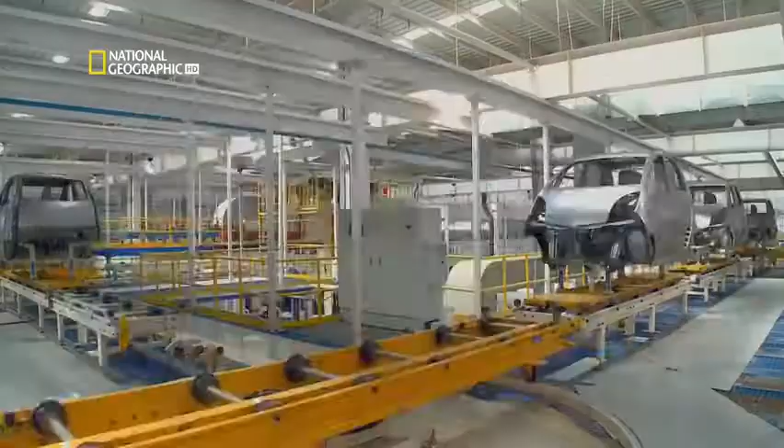But he'll have to battle skyrocketing costs, huge engineering hurdles, bad press, and violent uprisings. All challenges for the mighty Tata Motors mega factory.

Soon expected to overtake China as the most populated country on Earth, it's already home to 1 in 6 of the world's people. 2/3 live in small rural villages, seemingly untouched by time. But ancient India is urbanizing at a dizzying speed.

Despite that, only 15 out of every 1,000 Indians own a family car. For most, it's a dream, way beyond their reach. They make do with a family motorbike, or get a ride with friends. But that could change when Tata Motors releases the world's cheapest car, the Nano. It's the dream of company chairman and legendary tycoon, Sir Ratan Tata.

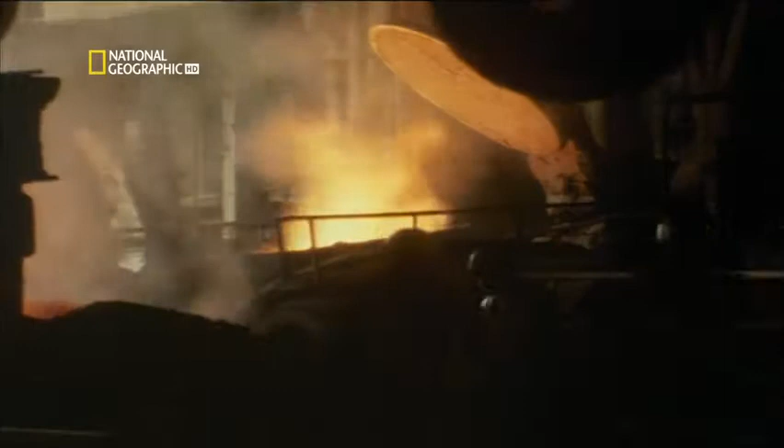He works his way up from running a furnace at Tata Steel to running the entire Tata Group. It's a global juggernaut worth $100 billion. In India, Tata is everywhere. Tata hotels, malls, communications, and above all, Tata Motors, one of India's top 3 car makers, a world leader in trucks and buses, and now proud owners of British luxury brands Land Rover and Jaguar. But even for India's most powerful CEO, reinventing the car is going to be a gargantuan challenge.

To make his dream come true, Tata has pinned his hopes on a purpose-built mega factory near the town of Sanand in the state of Gujarat. It's a sprawling 450-hectare complex of massive workshops, linked by roads and sky bridges. The workforce of 2,300 mostly get here by bus or a trusty motorcycle.

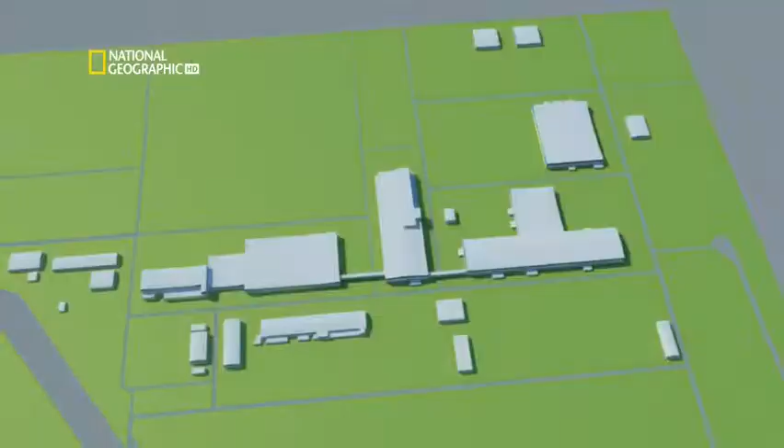The factory is made up of 5 main sections. The engine and transmission are assembled in the powertrain building. Sheet metal is pressed into panels in the press shop. The weld shop assembles the panels into a body, which is sent across a sky bridge to the paint shop. All the parts come together in the trim, chassis and finish, or TCF shop.

When it gets up to speed, this factory can produce 350,000 Nanos a year. It boasts state-of-the-art automation and over 130 robots that would be right at home in Japan.

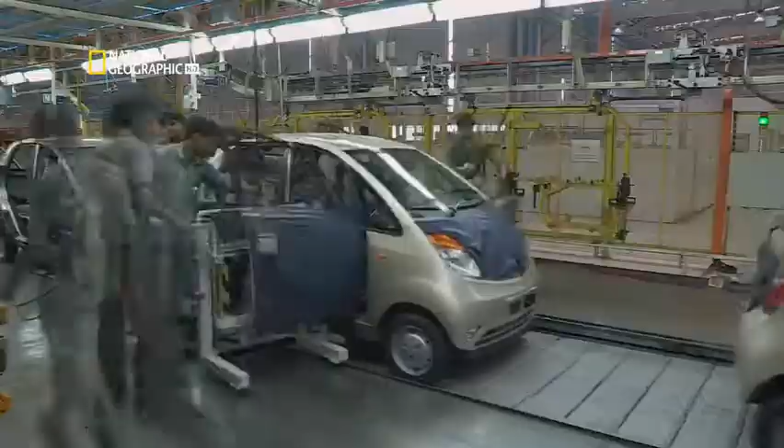But to run them, they'll have to train a workforce of villagers. Just one of the many challenges the team must overcome. They're going to deconstruct the car as we know it and put it back together with fewer parts and at half the cost. They'll have to reduce the cost of everything, from design right through to production. But it still has to be a car that people will want.

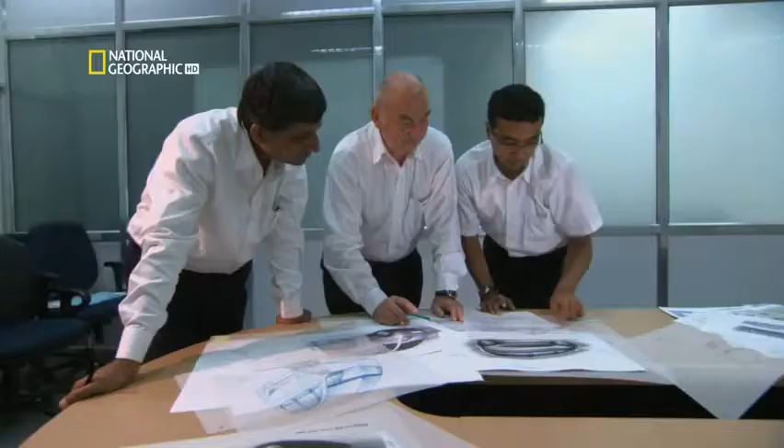It's a real conundrum. Safety, aesthetics, fuel economy and handling are all going to be important. But if they blow the budget to achieve them, the Nano will lose its unique selling point as the world's cheapest car. No wonder the design team is a little nervous.

The team came back after the meeting with Mr. Tata in 2003. Was really initially very much confused. Well, there was a lot of doubt whether we can really achieve it. It was really a challenge. We had never heard of a price that low. It was so challenging that I said, hopefully we can do it, but it will be the most difficult project in my life.

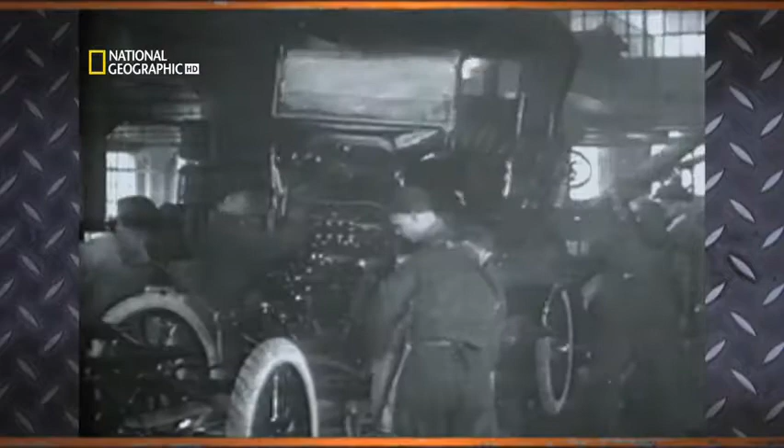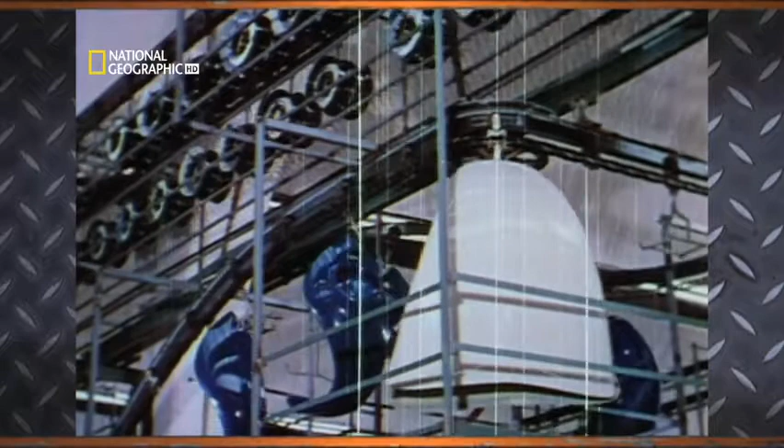If they succeed, the team could make history. The Nano will be a people's car. India's answer to the Model T Ford. When Henry Ford introduces the Model T, the $850 price tag puts car ownership in the reach of millions of Americans. That's about $21,000 in today's money. Volkswagen is German for people's car. It goes on sale for today's equivalent of $11,000. The Nano is slated to come in at a quarter of that.

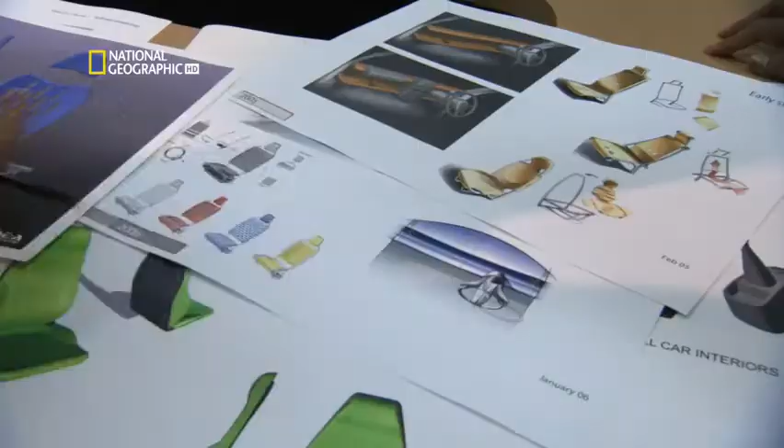Designing this impossible car happens at the passenger car division of Tata Motors near Pune. Pune is the largest of Tata's 5 plants; it has 20,000 employees. But hardly any of them know what's going on at the Engineering Research Centre. Codenamed Project X3, it's so secret, only a select group knows it exists. As soon as the initial shock wears off, they start thrashing out ideas.

So the team initially worked on lots and lots of concepts. How to make this car, whether the car should have doors, whether the car should be made in plastic. We played with really crazy ideas, whether we can use composite materials, maybe paper somewhere, you know. Or whether it should be a 3-wheel, 4-wheel, whether the engine should be in the front, engine should be in the rear.

But some of their ideas, like bars to stop people falling out instead of doors, don't sit well with Mr. Tata. Well, they looked horrible. They looked as though somebody plucked an eye out and they were just empty sockets. And that led me to feel that probably a customer wouldn't want a half car. Tata is adamant that the Nano must have 4 doors. Even 2 doors would greatly reduce costs.

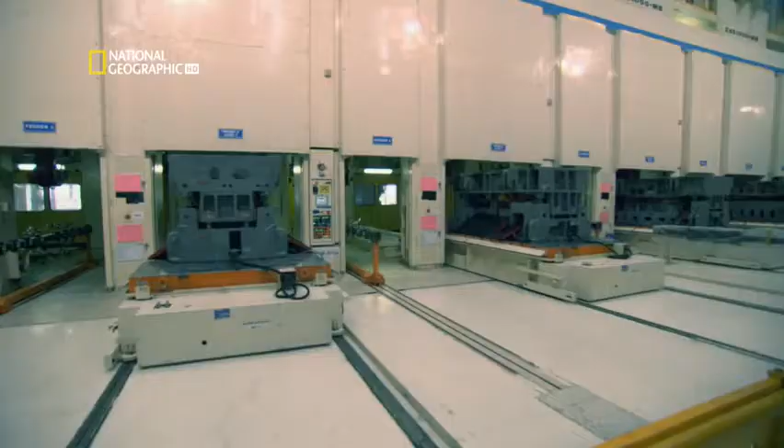That'd be all right in the West, where single-occupant vehicles are the norm. But this is India, where people ride 4 to a motorcycle. They're going to put at least that many in a car. And for women in traditional saris, clambering into the back of a 2-door car simply isn't an option. Why is it more expensive to make a 4-door car? For one thing, it takes 3 production lines to make 1 door.

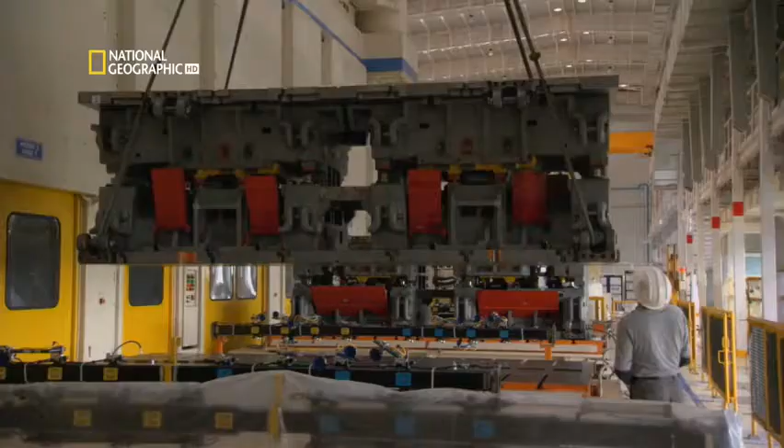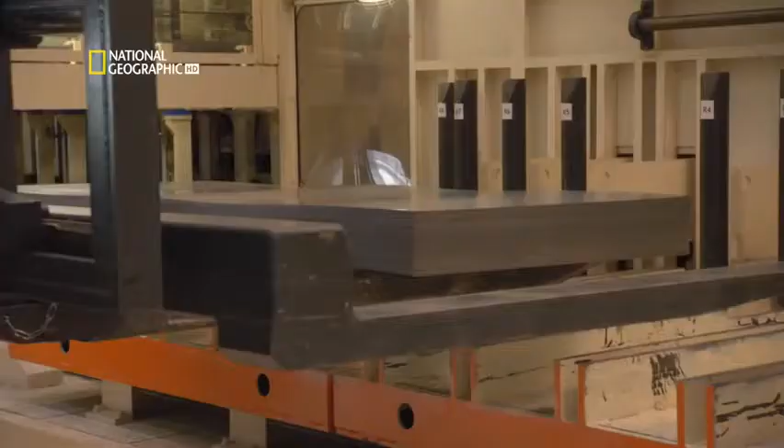And it starts in the press shop, where raw steel is shaped into panels. It takes 5 cast iron dies, each weighing more than a bull elephant, to make 1 door. The high-speed tandem press can stamp out 2 sets of panels simultaneously. Sheets of steel are fed into the press by forklift, much faster than the overhead cranes used in most press shops. Then, the tandem press gets to work.

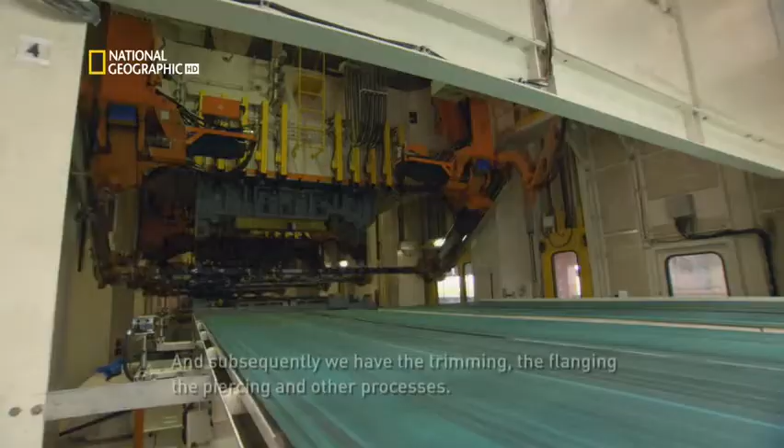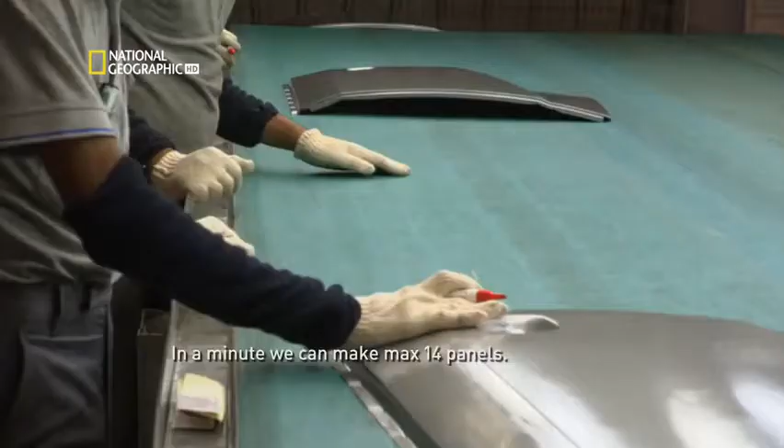First of all, you will have the basic shape of the car, and thereof the extra parts will be cut off. And subsequently we have the trimming, the flanging, piercing and other processes. In a minute, we can make max 14 panels. The finished panels are inspected for tiny imperfections by hand. Only those that pass muster are taken to the hemming line, where inner and outer door panels are joined together.

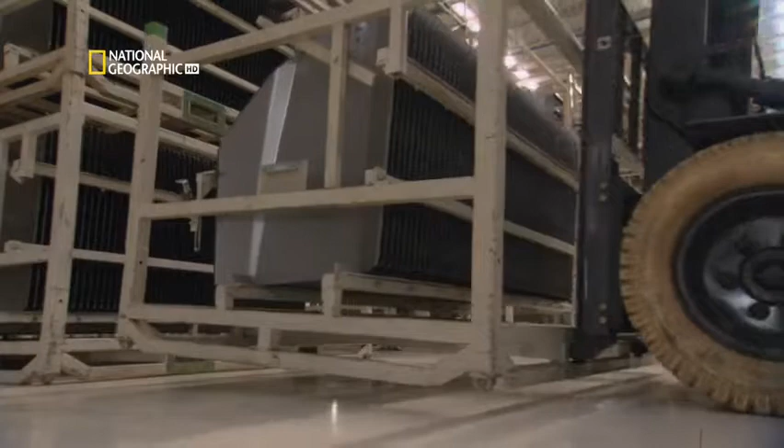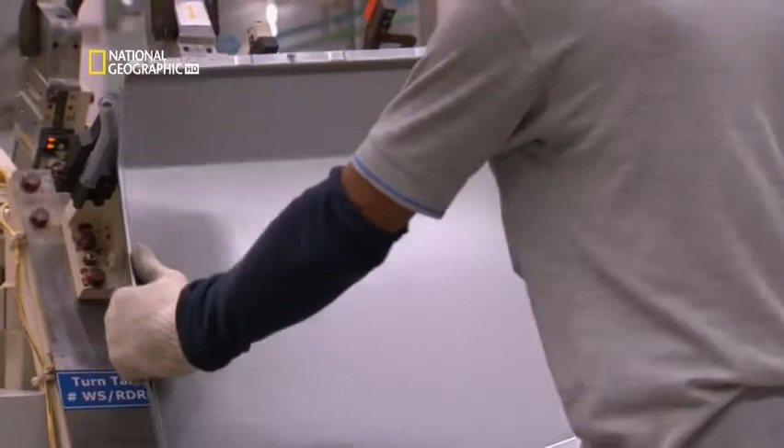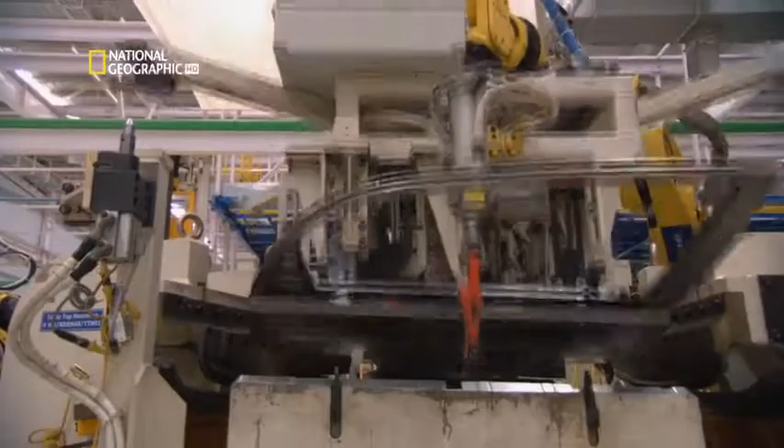It's a job that takes 2 robots and humans to feed them. First, a robot applies a noise-absorbing foam between the panels. It presses them together and folds or hems the panels to join them.

Robots help keep costs down, but achieving the Nano's 1 lakh price tag starts at the design phase. Despite the cost, the team manages to include 4 doors. Now they can turn their attention to the heart of the car, the engine. There are 2 important decisions to make. How big should it be? And will they put it in the front or the rear?

Rear engine cars are highly unusual. But for designers of compact cars, they have one very big advantage. It leaves room for more people. It was actually my dream, you know, because I knew to make such a compact car with full space for 4 people, you can only achieve it if the engine is in the back. It is kind of a Volkswagen lesson.

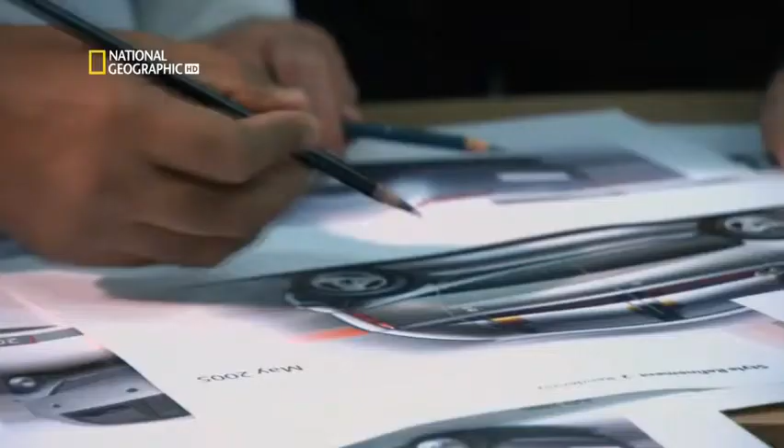But where the original Beetle's engine is behind the back seat, the Nano's is under it. That means raising the roof, which turns out to be another advantage. The lower the car is, the more difficult the entry, especially in India, maybe with a different kind of dress or sari. There are challenges too, such as keeping the engine compartment cool. I think we will also better address the requirement of cooling, which is coming from the engineering side.

After many attempts, the team places air scoops behind the rear doors. And it sort of shows that it's a rear engine, so it has a nice cooling duct created like a rear engine. Also much better is this quarter here, clean. Simpler. And yet it makes the car look much more sporty.

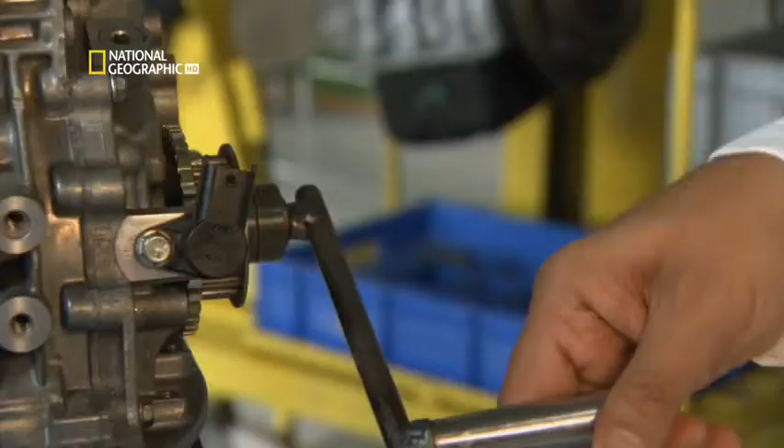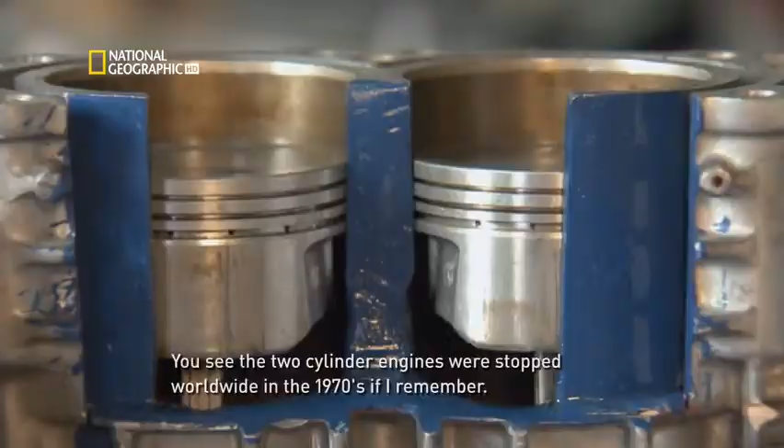Designing the engine itself is a job for Tata's legendary engine designer, Narendra Jain. To keep costs down, he decides to go with just 2 cylinders. You see, the 2-cylinder engines were stopped worldwide in the 1970s, if I remember. There's one big drawback to a 2-cylinder engine. It's inherently unbalanced and prone to violent shaking forces.

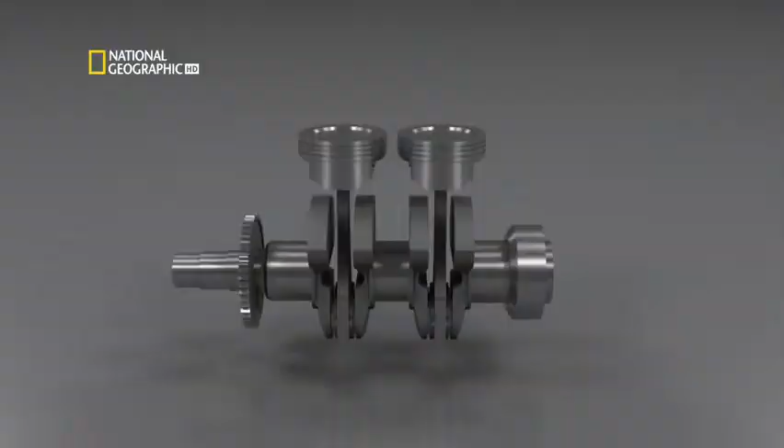In this engine, the 2-cylinder, both the pistons are going up and down at the same time. If we see, there are 2 counterweights. This is to balance the mass of this piston and connecting rod which is moving up. The weight of the pistons moving up and down is balanced by weights attached to the crankshaft. While the pistons move up, the weights on the crankshaft move down, balancing the vertical movement.

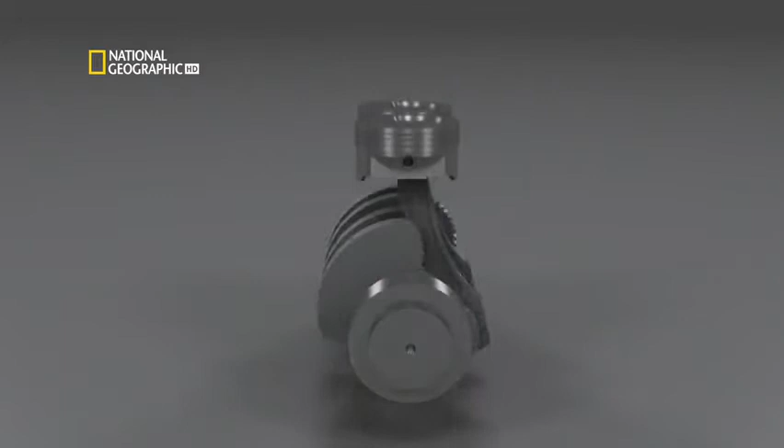But the crankshaft weights don't just move up and down, they turn around, which means the crankshaft now creates its own horizontal shaking. To counter that, Jain designs a single balance shaft. This weighted shaft spins in the opposite direction to the crankshaft, so it cancels most of the horizontal shake. Damping down the shaking with 1 balance shaft instead of the usual 2 means another cost saving. But will it power the car?

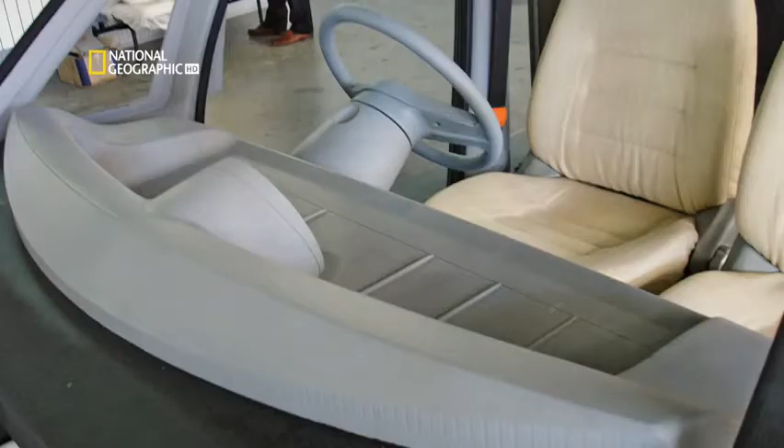To find out, they mount it on a simple frame known in the trade as a mule. So the mule is like a very, very early pseudo prototype, or the first thing that you see. This is what it will feel like. It gives you the idea of what the car feels like when you drive it, when you turn it, when you try to push the engine. The mule is the culmination of almost 2 years of work on Project X3. Showing it to Mr. Tata is a pivotal moment.

I drove mules through the cycle. The first one was very disappointing. The mule is woefully underpowered. So he drove and he was not very impressed. I mean, we were waiting at the test track to hear his reaction, and people who were with him in the car said that he was not very thrilled when he drove it.

It's time for some fresh blood. Enter Girish Wagh. He's just successfully developed a light truck called the Ace. The tiny 2-cylinder Ace is a smash hit. But can he do the same for the Nano? The first priority is to sort out the engine.

We increased the capacity of the engine, and believe me, this takes almost 9 to 10 months to do this kind of a job. We put it on a prototype again. It was refined enough so that you felt that it didn't sound like a motorcycle with 4 wheels. He came again, he drove the vehicle, and he said, I think now from a drivability point of view, we are there. The little engine that could comes together in the powertrain shop.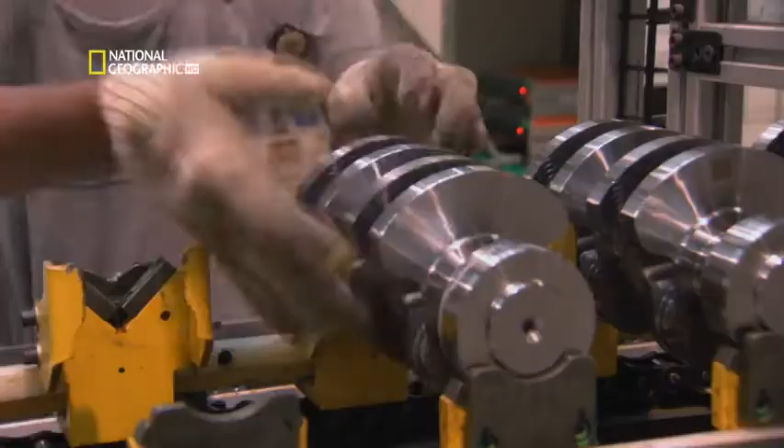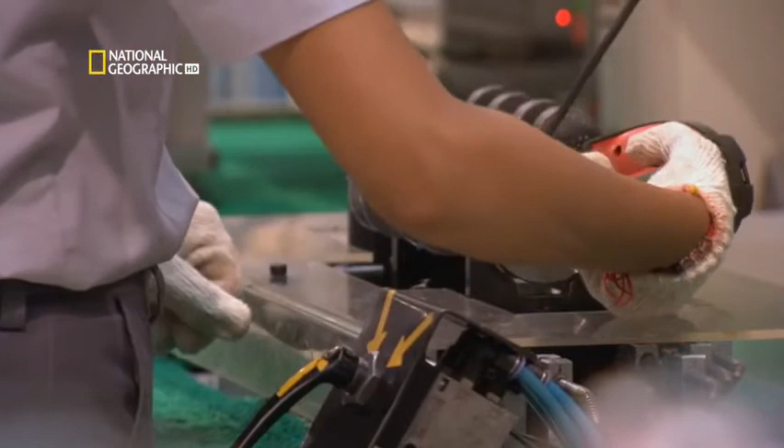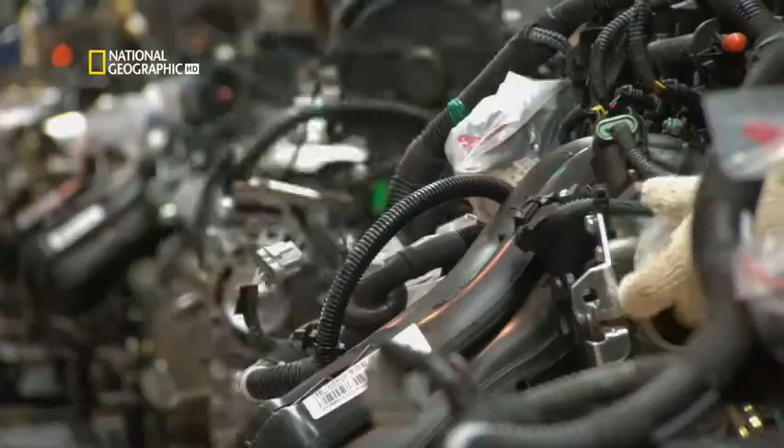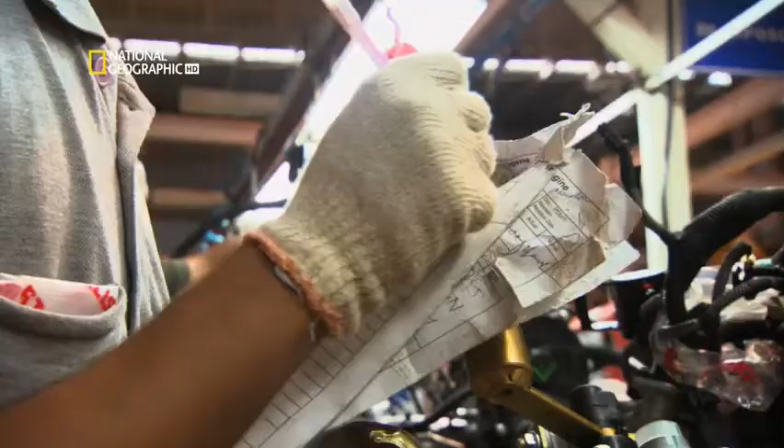Men, women and machines work together to make everything from the crankshaft to the engine blocks. The final assembly of the 35 horsepower engine is all done by hand. Skilled workers join the modest little power plant to a 4-speed manual transmission. This will see the Nano get an impressive 24 kilometers per litre, making it the most fuel-efficient petrol car in India. No point in making an affordable car that isn't affordable to run. The engine is also a lot cleaner than the polluting used cars and motorcycles it aims to replace.

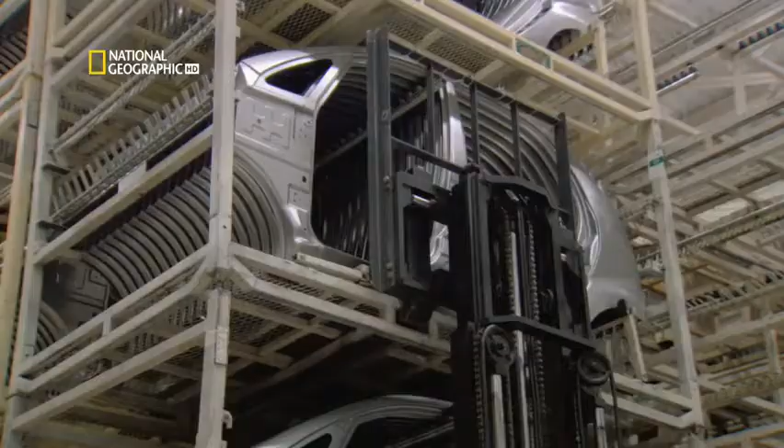While the powertrain is assembled, a body is born in the weld shop. Joined to the press shop, the weld shop takes in 11 kinds of body panels, which will be welded together to form a steel unibody. Most cars are made like this, but steel was not Team Nano's first choice. One word: plastics. Initially, when we started, we thought we'll go for a plastic body instead of a sheet metal. And the idea was to reduce the weight. But it's an idea ahead of its time.

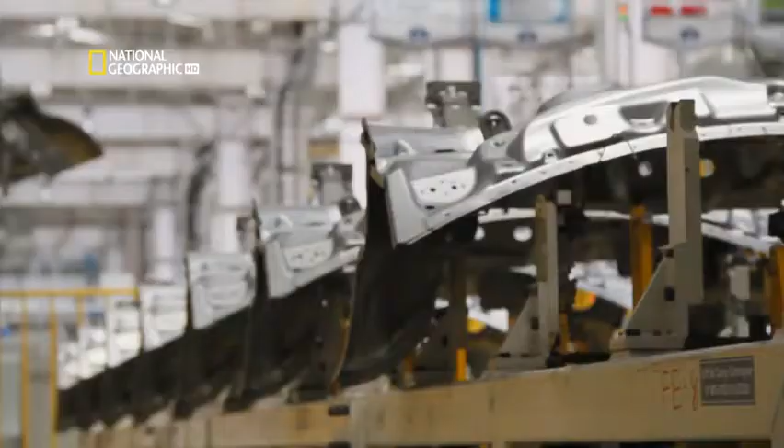We found out that if we go for a plastic, from the cost point of view, you are not better, you are worse. And India may not be the right place for plastic cars. In terms of Indian driving conditions, in terms of dentability, the sheet metal is better. If you have some dent, you can repair it very fast. You need not change the panel completely. So steel it is. 130 robots in this ultra-modern mega factory weld it together with ruthless efficiency.

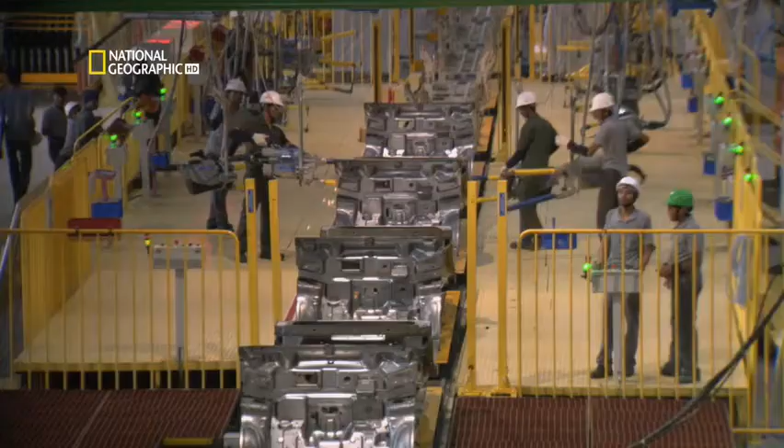But raw material prices increased 40% between Tata's announcement of a 1 lakh car and the start of production. Perhaps the greatest fear in my mind was that as we had transformed to a conventional process, we would not make the price line that we had thought of. For Tata, a promise is a promise, and it's up to his engineers to deliver on it. So how do they do it?

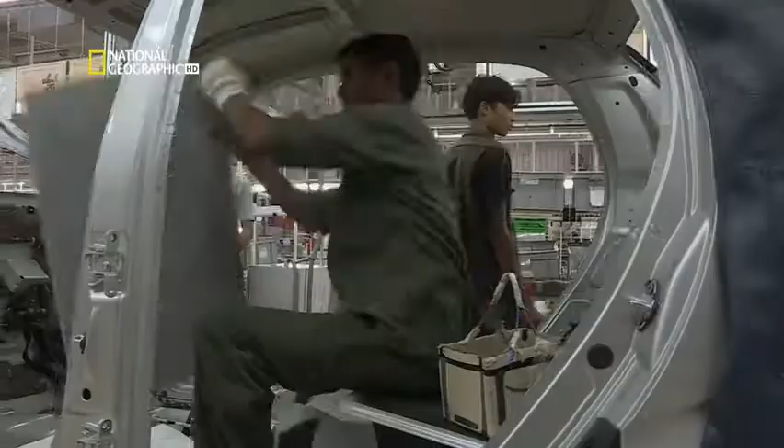From our experience, I don't think there is a single magic bullet. We have to work on each and every part in the car and see how we can reduce the cost of that part, or eliminate some of the parts, or combine the functionalities so that finally the number of parts comes down. They call this minimalist approach Gandhian engineering. Nothing goes unquestioned.

This is the fuel pump unit. This goes into the fuel tank. So there are basic 5 components here. One is the fuel pump, a pressure regulator, a rollover valve, a fuel level sensor, and this is the flange which holds everything and mounts everything onto the fuel tank. To get the price of the whole unit down, they asked the supplier to reduce the cost of each individual component. They proposed the pump from the motorbike because our engine is very small, 2-cylinder, 624cc engine, so it makes sense that this capacity is enough.

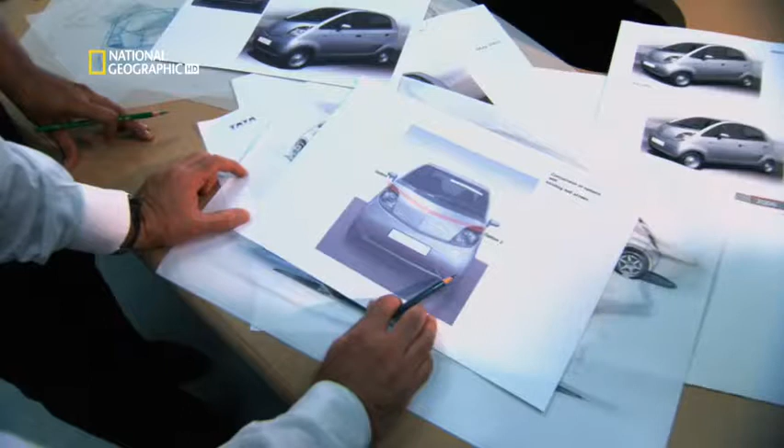For all their clever engineering, the designers are most proud of the Nano's looks. The lamps are like eyes, a little bit smiling. I like the idea of big lamp, Nikhil, because we have to have some element which shouts to the people and which shows character to the car. If not, we'll finish with plain surfaces. Horizontal lamps and a curved bonnet give the Nano an almost human face. The team feels sure it's onto a winner. We need a strong element, very singular strong element.

But Mr. Tata wants one more change. This was almost a week after we signed off the final design. He observed the car and noticed that the nose dived down rather quickly for the length of the car, and he thought that it'd make the car look snub-nosed. He wants it to be 100 millimeters longer. At the same time, they have to move the wheels out to the very corners of the car to free up more space for passengers. The car was so compact that we had a little bit of a problem to make a nice shape. So this extension actually improved packaging, improved stability, and also improved styling.

But the changes mean pressure on the entire team. And we really worked 24 hours a day. We had to work really hard then. And when he saw it, he was quite happy. And I think after 2 weeks, we had signed off the CAD concept.

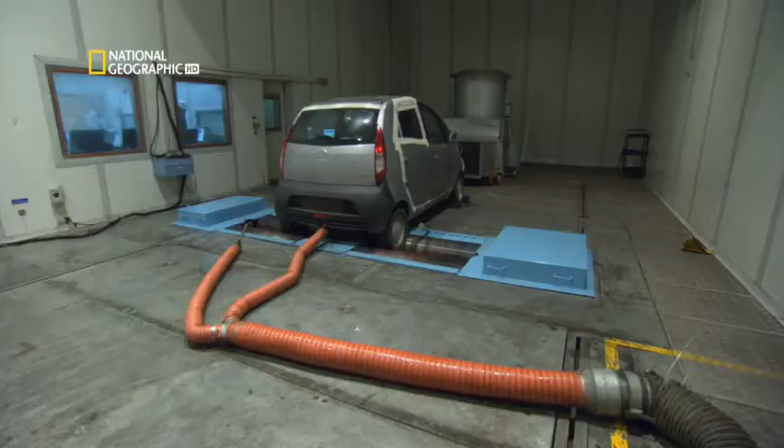Before they reveal the prototype in public, it must pass a punishing series of tests that simulate Indian road conditions. Tight turns for narrow city streets. A torture track as rough as any Indian road. A 30-centimetre water trough mimics the monsoon floods. You could even take your Nano to the Himalayas. It handles steep hills and has been tested and approved at temperatures as low as -50 degrees Celsius. They're ready. It's time to show the people's car to the people of India.

Ladies and gentlemen, thank you for being with us on this memorable occasion. While a holographic image of Tata warms up the capacity crowd at the Delhi Auto Expo, the man himself waits nervously backstage. If you want to name a moment of fear, that was truly it. As I sat behind the curtain, I kept thinking of all the things that could go wrong.

And when I did drive the car out in a darkened hall, what struck me was the enormous amount of people there and the applause and so on, and it shook me up a bit. Overawed by the cameras flashing, and I'd never faced anything like that in my life. Probably never again anyway.

Tata needn't worry. The Nano is a smash hit. The reaction at the opening was far, far beyond my expectations. You could see hundreds of cameramen, hundreds of press people. Flashbulbs going around, people clapping, and there was thunderous applause. I don't know what people may have expected to see, but definitely they did not expect to see a Nano.

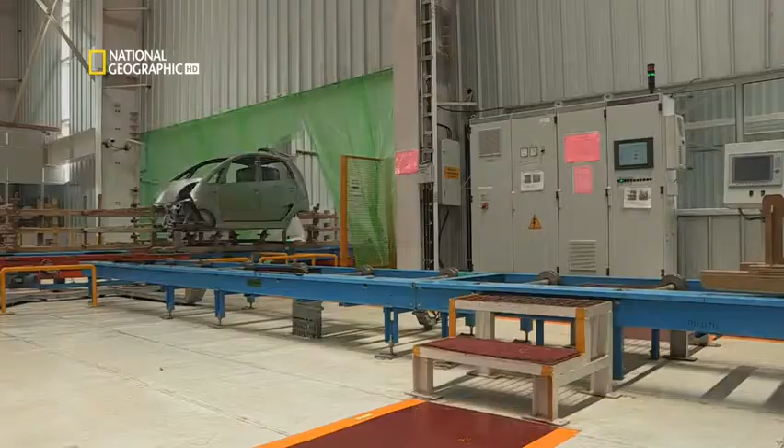Back at the factory, it's time to kick the production line into top gear. First stop, a good coat of paint. The paint shop is a short ride by Skybridge from the weld shop. The industry calls an unpainted car frame a body in white, or BIW. The doors and bonnet are clamped open so that the paint can reach everywhere.

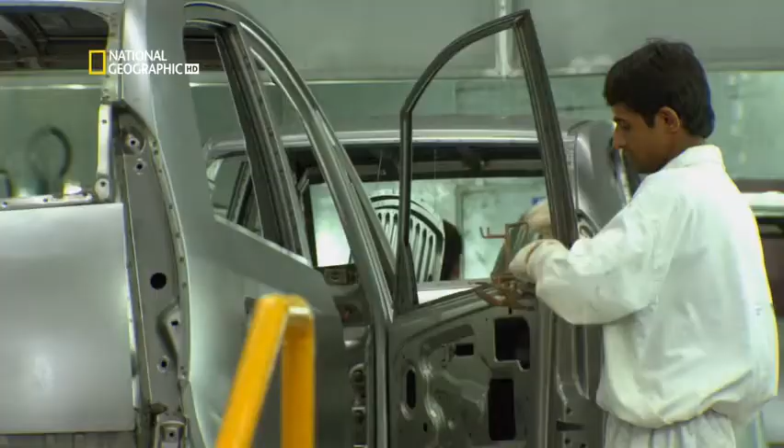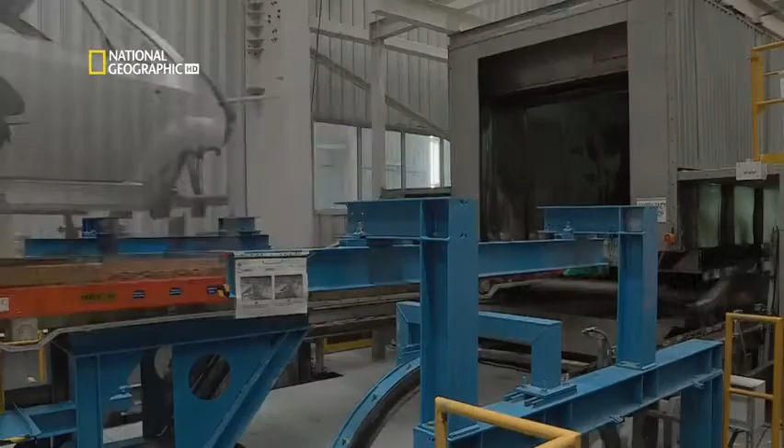The BIW is thoroughly checked for defects. Then it's degreased and prepared for painting. Once the body comes into the paint shop, the body goes for the pre-washing. After the pre-washing, the phosphate coating is happening. After the phosphate coating, the body goes for the electro coating. The protective primer is bonded to the freshly prepared metal by an electric current.

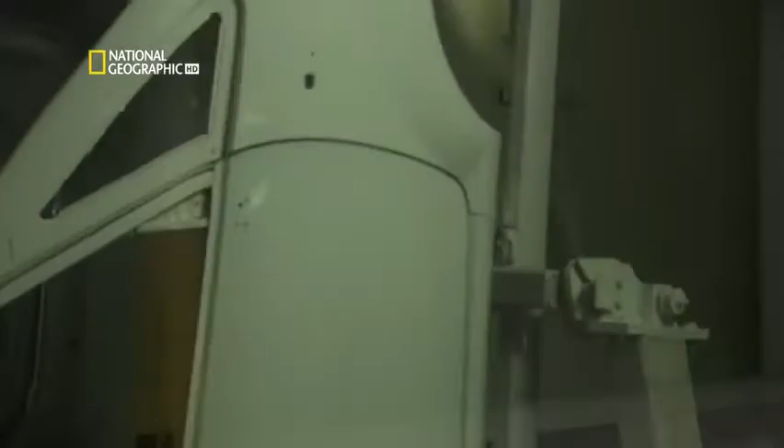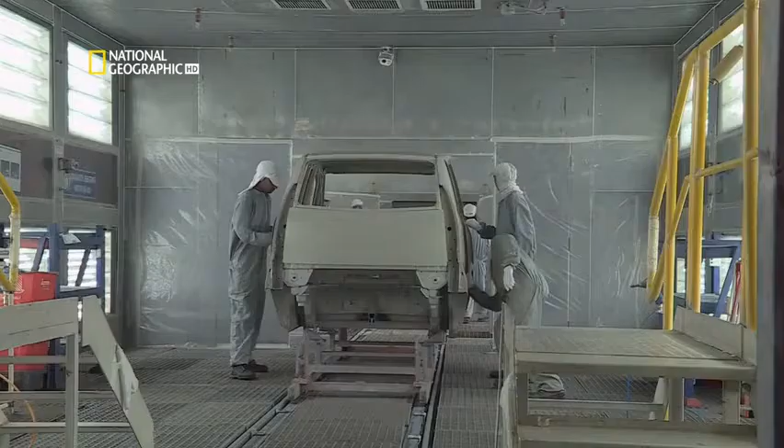This coating is extra important in modern cars because the entire structure is made of thin sheet metal. Any corrosion could spell disaster. Spinning the body 360 degrees guarantees all-over coverage. It means that coating applies to every corner of the body, not only from the outside, but also from the inside. Now the primed bodies are ready for painting. Once again, they're inspected.

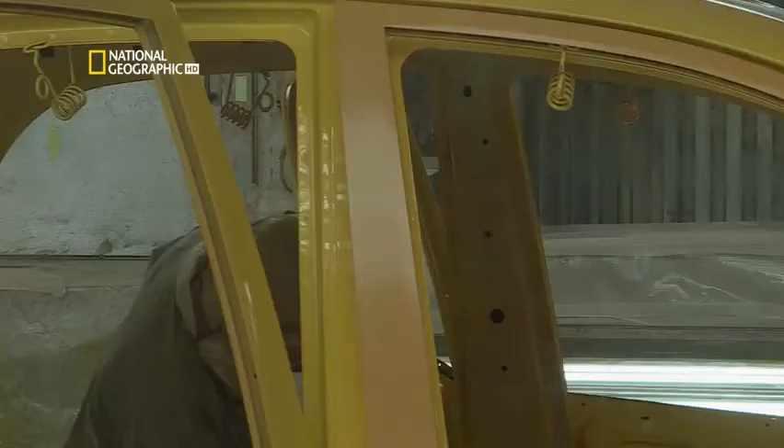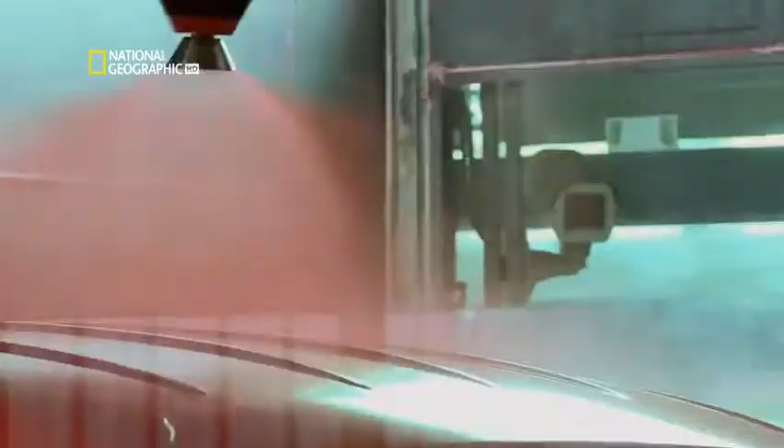Then the insides are painted by trained technicians, while the exterior coats are applied by programmed robots. In this energy-efficient paint shop, all the paint coats can be applied in quick succession. The bodies are only baked once all the coats have been applied. The paint shop is one of the most expensive parts of any car factory. And this is the second time Tata Motors has had to build it.

They built the first paint shop in 2007 at the original Nano factory in Singur in the communist state of West Bengal. We went to West Bengal because we felt that part of the country had been vacated by industry for some time. And I really believed that the government of West Bengal was genuinely keen on bringing industry back. So with a leap of faith, I convinced the board that we should go there.

But ownership of the land allocated to Tata by the government is disputed by local farmers. From the outset, they try to thwart construction. We had a fair amount of people beaten up, material being stolen, walls being broken. For 2 years, Tata holds out, but eventually the situation becomes untenable. At one stage, at the height of the problem, there were close to 100,000 people outside the gate. They were now just weeks away from opening, but it was too dangerous to continue in West Bengal.

That decision to close the plant was a very painful decision, you can understand it. I can't explain to you the feeling that we went through. Much as it hurts them, they're going to have to move the whole shebang 2,200 kilometers to a friendlier home in Gujarat, on the other side of India.

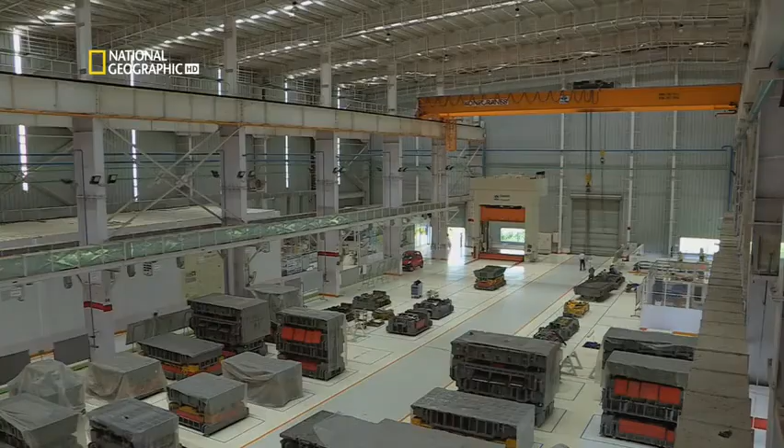It'll probably be the world's biggest ever relocation. And as if that wasn't enough, the project is now dangerously behind schedule. We were a little worried because it was a Herculean task. Dismantle, shifting, installation and recommissioning, the total period was only 1 year. It takes Ramesh 3,400 truckloads to transport the factory, lock, stock and barrel, across India's notorious roads. A single road accident could derail the entire project.

Such huge plants needed to be shifted, but we did it. We did it successfully. There was no loss of parts, there was no damage, although we shifted 2,250 kilometers away from Singur to Sanand, but still we maintained the quality. Now Ramesh faces a new problem. There are few skilled workers to crew the factory in rural Gujarat. They'll have to train hundreds of villagers in a specially built training centre at the factory.

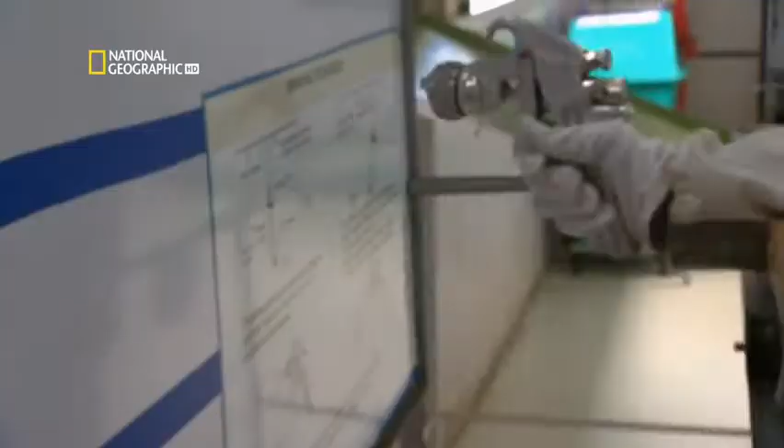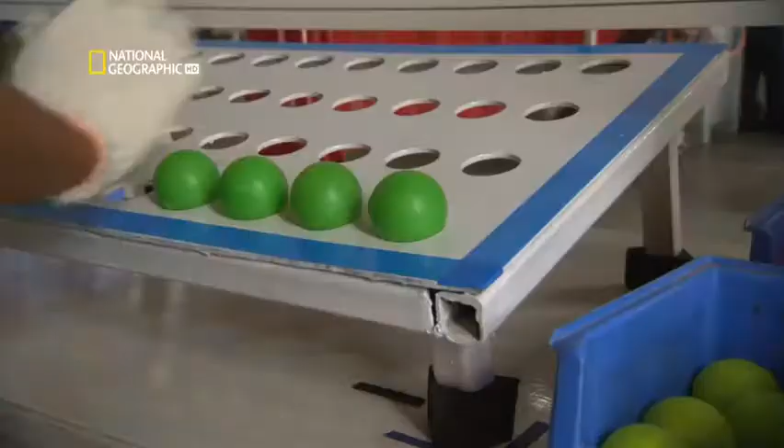They've just overcome 2 massive hurdles, only to be confronted by another. Some of the early Nano models catch fire on public streets. It's a public relations nightmare. Team Nano swings into action, setting up a team of local and international experts to investigate the fires. We said, let's look at it in a positive manner and let's do something even safer. We did a very thorough investigation and analysis of the situation. We also got some forensic experts from abroad, from the UK.

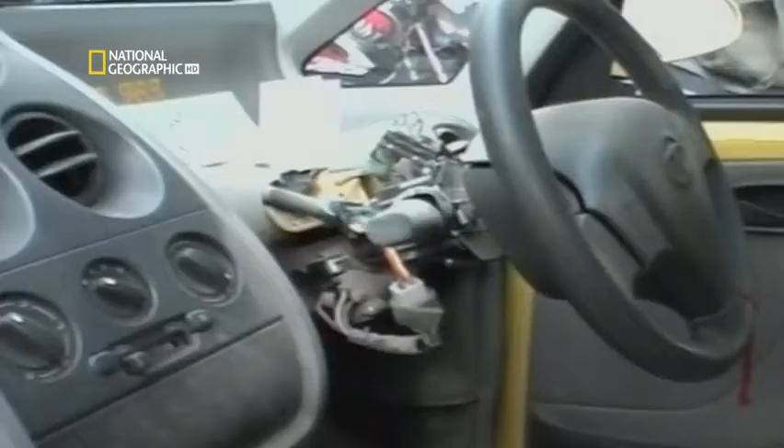And they looked at all the incidents and they gave a totally clean chit and said that nothing was wrong with the design of the car at all. In some cases, we had found that a foreign piece of cloth was left on the exhaust system of the car. And the customers had also tapped the electrical system for some accessories, and that had also led to some short circuit in the electrical system.

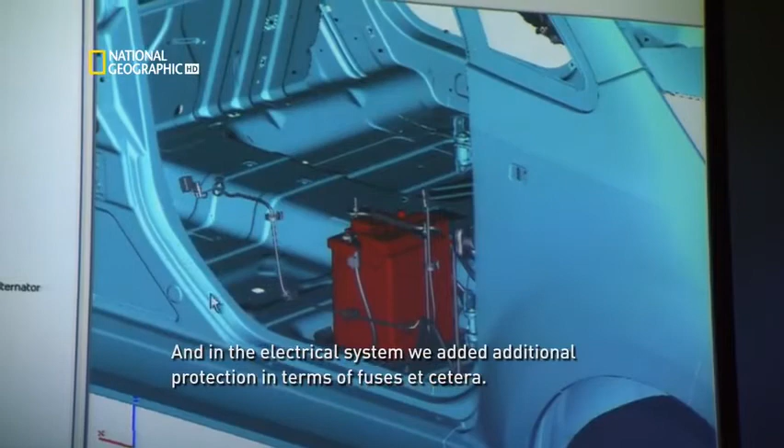In response, Team Nano decides to make the car even more robust. On the exhaust system, we provided additional protection. And in the electrical system, we added additional protection in terms of fuses, etc. Whatever causes we identified for the fire incidents on the Nano, we provided additional protective cover to ensure that such a case doesn't lead to the car catching fire. With the fires under control, it's time to celebrate.

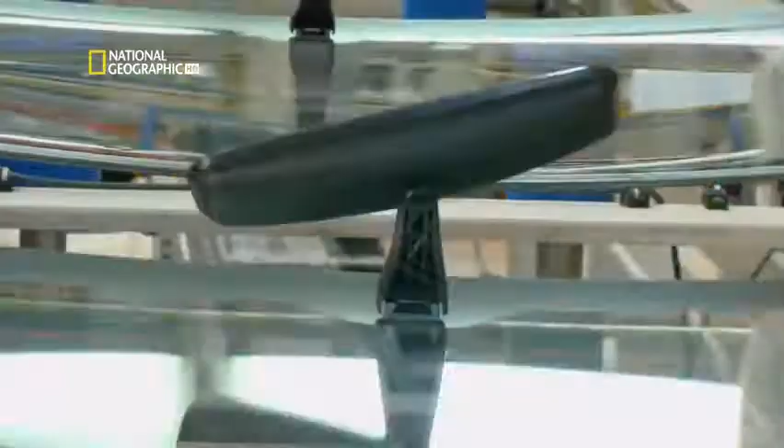In June 2010, Ratan Tata officially opens his new mega factory. It is a great occasion today to be here, and I hope that in the coming years, we will see the product on the streets and the roads of India, giving the people of India a chance to have personal transport. Production of Nanos finally reaches top gear. They need to sell hundreds of thousands of Nanos to break even, and that required sophisticated automation technology. We have 70% automation, 130 robots working in the plant. And in the body shop, one body can be produced within 53 seconds.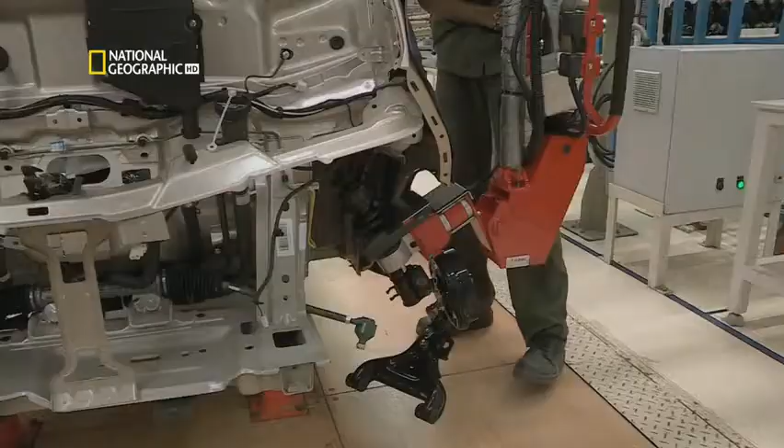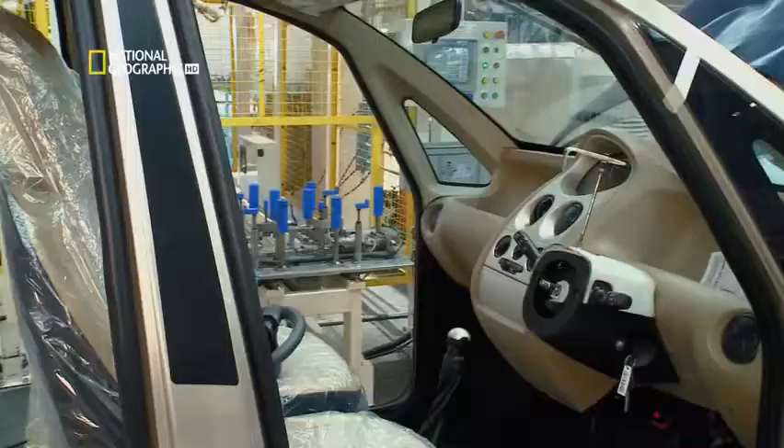The painted bodies arrive suspended from a monorail. In 6 short hours, they will drive out under their own steam. First, technicians install the fuel tank and wiring harness on the underbody. Next, the doors, which were painted with the car body, are removed to give workers easy access. Later, the automated system will match them up with the exact Nano body from which they came. On goes the front suspension. In goes the dashboard. The seats. And the steering wheel. It looks ordinary enough, but behind the wheel is another triumph of cost cutting.

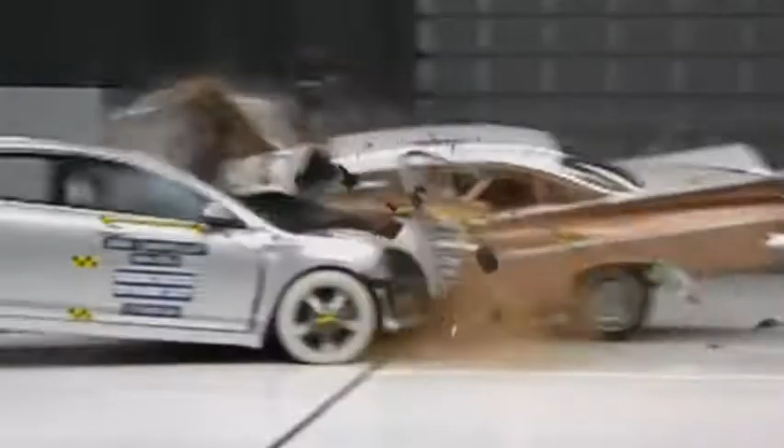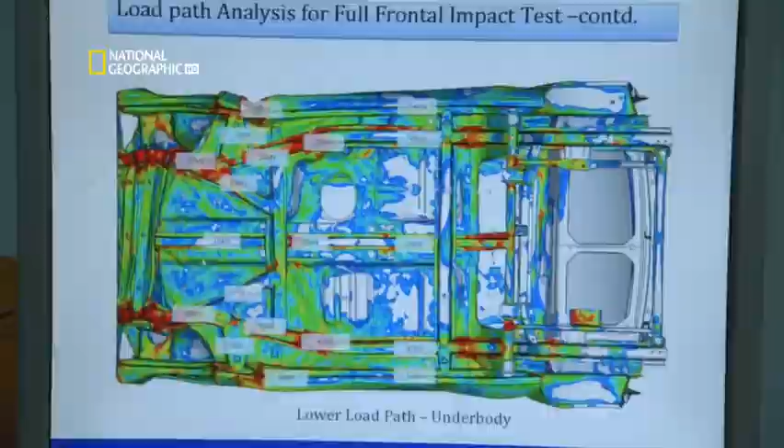Modern cars have expensive steering columns that collapse on impact. Non-collapsible steering columns haven't been used in the West in decades because they cause nasty injuries in a crash. However, Tata's safety engineers wonder if there isn't a way to cut costs without cutting safety. We can now say we don't need a collapsible column. Now with this improved design, we were able to go ahead without the collapsible steering column.

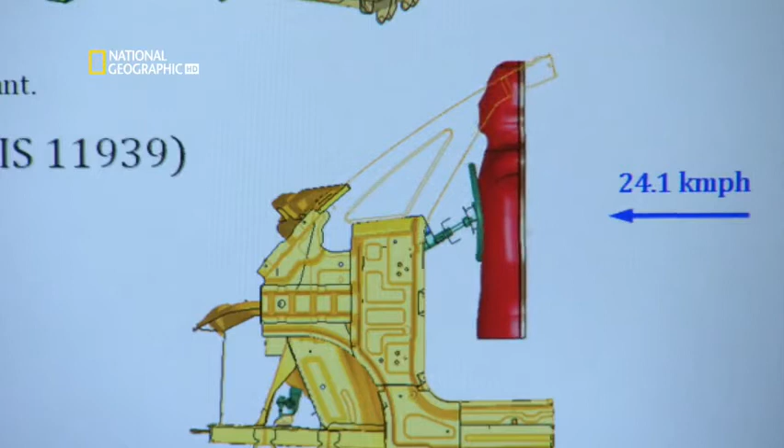Digital crash testing allows them to quickly and cheaply try out new ideas. They discover that instead of a collapsible steering column, they can use the front of the car to absorb an impact. So in Nano, we had to cut costs. So one of the things we looked at was whether, instead of going for a collapsible column, we could just make part of the structure deform a bit and not offer that high resistance to the chest. And when they crash a real Nano, their findings are confirmed.

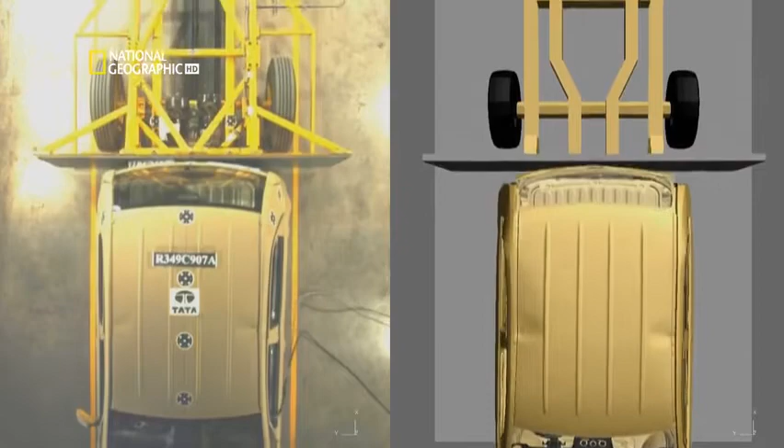The trick is having the engine in the rear. It clears off the space in the front of the car. You know, the complete front space was available for crush. So in this case, having the engine in the rear actually turned out to be a big bonus for the safety team.

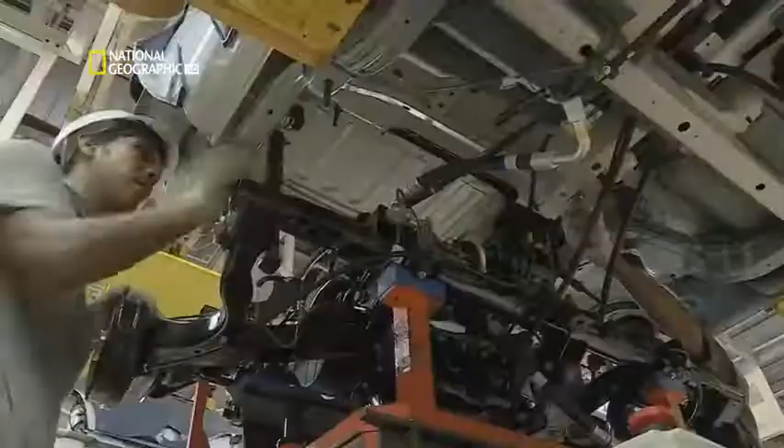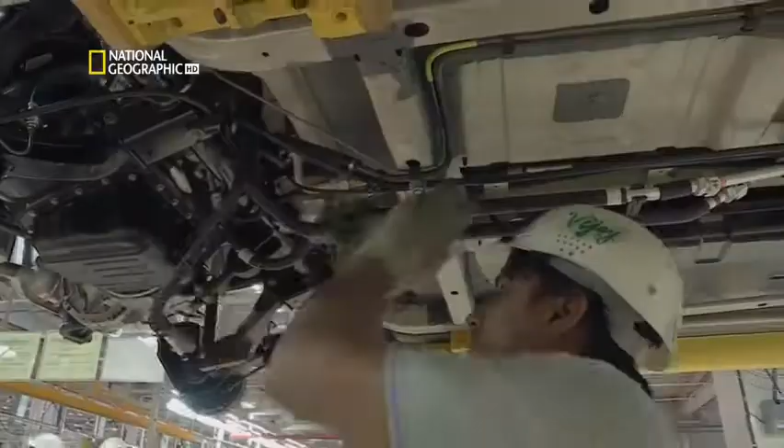Another big bonus is that rear engines are very easy to install in the factory. It slots in from below. The marriage of engine and body is more of a quickie Vegas chapel wedding than an elaborate church ceremony. It takes as much time to connect up the hydraulics as it does to bolt the engine beneath the rear seat.

But there is one disadvantage. When the Nano's small engine is running hard, it can be quite noisy. And that noise isn't under the bonnet, it's much closer, under the back seat. Reducing the noise becomes the biggest hurdle in the entire Nano project. So this Nano is a unique kind of car where there is a rear packaged engine which is sitting exactly inside the passenger compartment.

In this soundproof chamber, the team tests numerous engine mounts and sound-absorbing materials to reduce the noise and vibration felt by the car's occupants. With each change, they measure noise and vibration levels all over the car. After 3 years of hard work, we have solved all the issues, and right now the car is acceptable for the customer. It's small, it's tall, and it's surprisingly quiet inside.

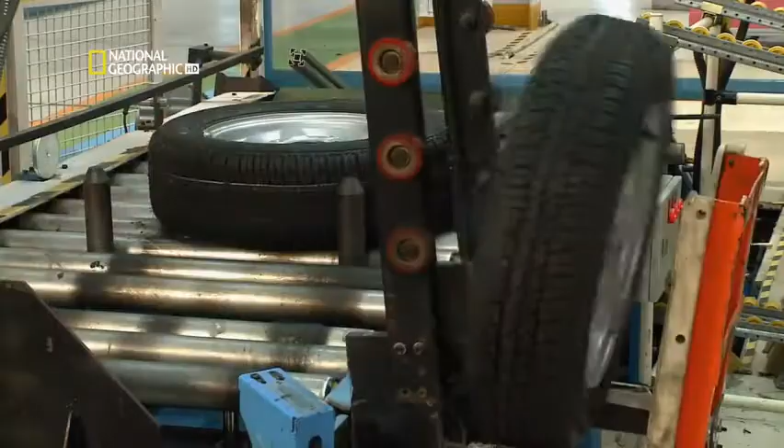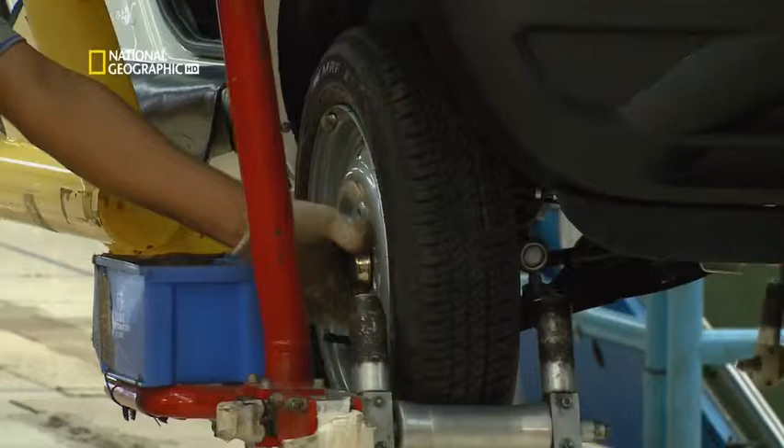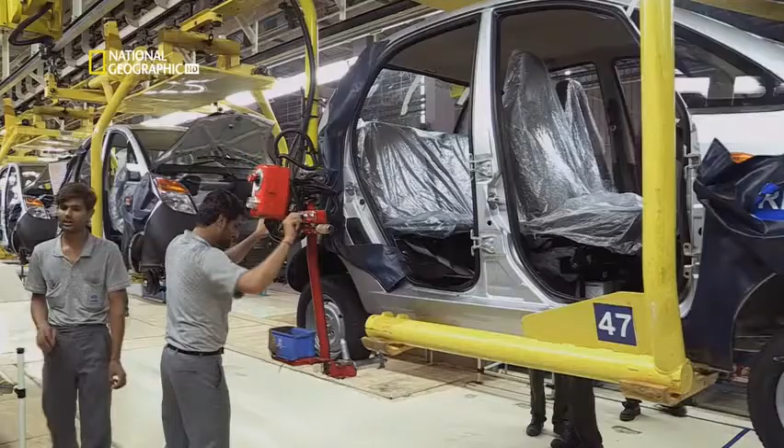But the technicians win the battle over lug nuts. There are only 3. So when we started with 3 bolts instead of 4 bolts, we made initial calculations and it really worked fine. We thought for this particular maximum speed of the car, the 3 bolts could be sufficient, and really it turned out to be that way. Finally, each Nano is reunited with its 4 doors. These people's cars are now ready for some people. Almost.

Outside, the rain is taking a break. But it's added an extra level of difficulty to the test track. Every Nano goes through this. And they test the brakes the old-fashioned way. Tata Motors starts to deliver Nanos to tens of thousands of eagerly waiting customers. Finally, everything is going their way.

But if you live outside the Indian subcontinent, don't look for one at a dealer near you anytime soon. There are no plans to bring the Nano up to stricter Western safety specs. In Europe and the US, Tata will instead offer a car based on the Nano platform. A concept car has already been unveiled. The Pixel is a futuristic-looking car made for city driving. We have tried to bring in a lot of new concepts on that. We have carried forward the rear engine philosophy, like Nano.

The Nano itself has only been out in the market a short while, but it's been garnering many great reviews. And Tata Motors are quietly confident about its future. I think it will turn into a big movement, I have no doubt in my mind, not just in India, but across the world. It's been a hard road to travel, but Ratan Tata's dream is slowly coming true. I will forever be respectful and recognize the effort the team made, because the real credit for the car and the heroes of this whole exercise are the team that put it together.